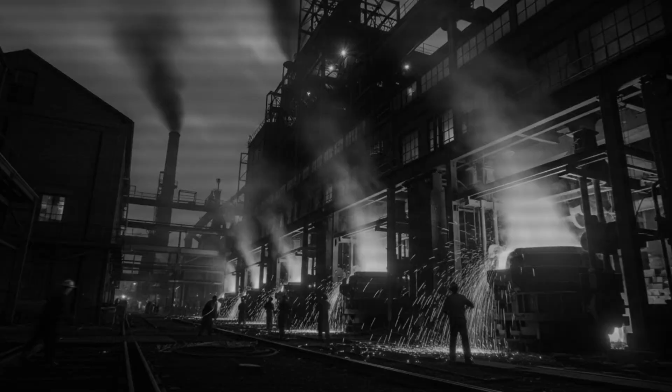As the bomb bay doors opened and thousands of pounds of explosives fell toward the factories below, German fighters swarmed in. Messerschmitts and Focke-Wulfs tore through the bomber streams. Tracer fire stitched the sky. Aircraft burned. Crews bailed out. Others vanished in spirals of smoke. By the end of the day, 60 B-17s were gone. Over 600 airmen were missing. More than 100 were dead.

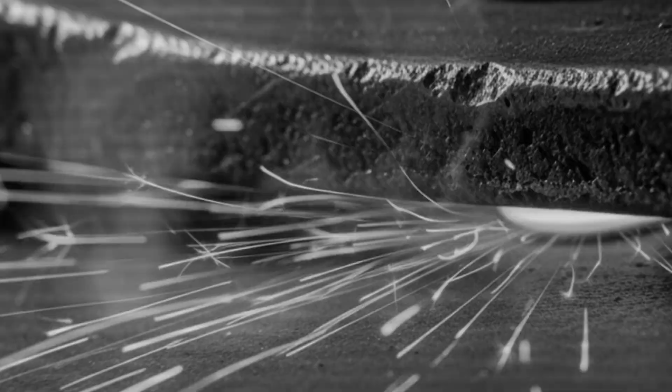While American crews were dying over Bavaria in an attempt to cripple German bearing production, something deeply ironic was happening thousands of miles away, in quiet industrial towns across the United States. American factories were already producing a bearing Germany could not easily replace, could not quickly copy, and could not stop by bombing Schweinfurt. A bearing that worked better for most military applications, and did not depend on German technology at all.

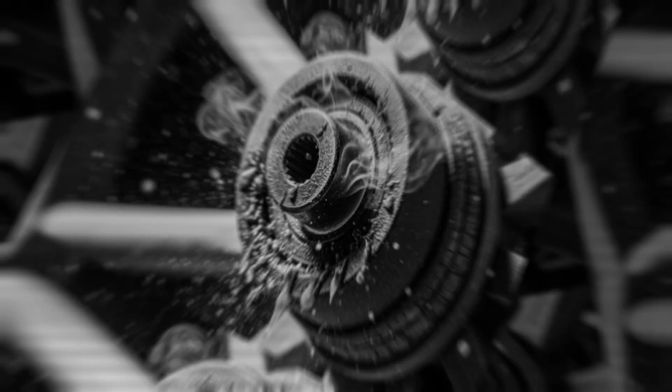Its story began not in World War II, not in Ohio, and not even in America, but in the mind of a German immigrant carriage maker, working in the late 19th century, obsessed with a deceptively simple problem: friction. Friction is the enemy of motion. Whenever two surfaces move against each other, energy is lost. Motion becomes heat. Metal wears. Efficiency collapses. From the first wagon axle to the most advanced turbine, controlling friction has always been one of engineering's central challenges. Henry Timken believed that anyone who could meaningfully reduce friction would create something of lasting value.

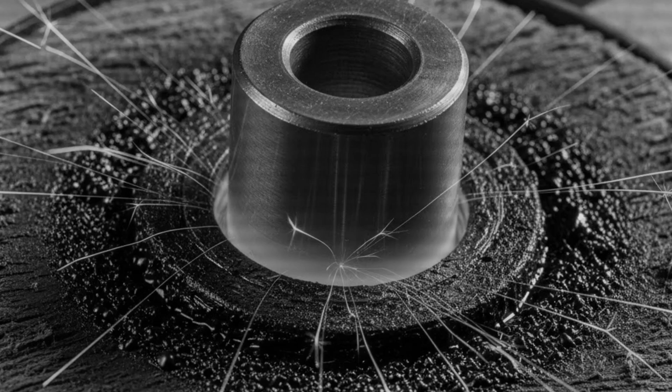He was born on August 16, 1831, in the Kingdom of Hanover, in what is now Germany. When he was 7 years old, his family emigrated to the United States, settling in Missouri. America was young, expanding, and hungry for infrastructure. Wagons, railways, machines—everything was being built, and everything depended on parts that could move reliably under load. As a teenager, Timken apprenticed with a respected wagon and carriage maker. He learned woodworking, metalworking, and, more importantly, the realities of mechanical failure. Axles seized. Wheels wore out. Bearings failed. Every breakdown was a lesson.

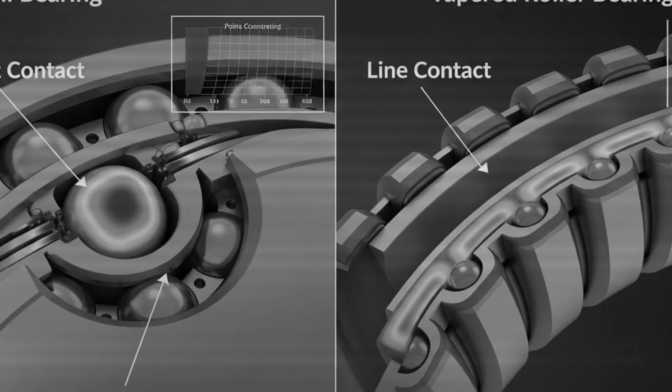By his mid-20s, Timken had opened his own carriage factory in St. Louis. He was not just a craftsman, he was an experimenter. In 1877, he patented an improved buggy spring that distributed load more effectively and survived rough roads better than existing designs. The spring was widely adopted across America and produced under license by multiple manufacturers, generating steady royalty income. The success of the spring brought Timken financial security and time.

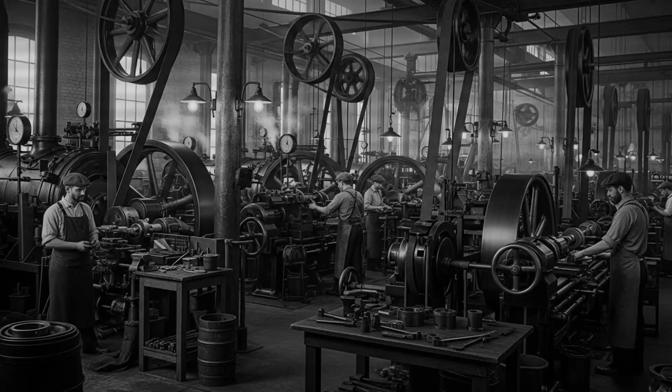Time to think. By the 1890s, he became increasingly focused on friction in wheel assemblies. Traditional bearings of the era were crude by modern standards. Most wagon wheels relied on plain bearings, simple metal surfaces sliding against each other, lubricated with grease. These worked, but they wasted enormous amounts of energy and wore out quickly under load. Ball bearings, which used hardened steel spheres rolling between two races, were a major improvement. They dramatically reduced friction and were ideal for light loads and high rotational speeds.

But Timken noticed a recurring problem. Wagon wheels did not experience simple, straight-down loads. They carried weight vertically, yes, but when a wagon turned, or hit uneven ground, or carried heavy cargo, the wheels experienced side loads and thrust loads at the same time. Ball bearings struggled under these combined forces. Their point contact concentrated stress, causing rapid wear and failure. Timken believed there had to be a better way.

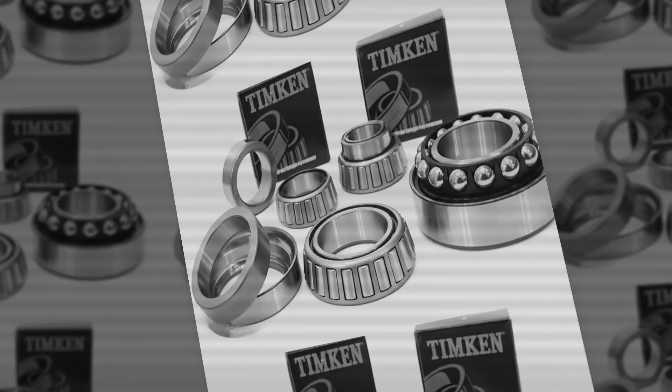With the help of his two sons and a nephew, he began experimenting. The solution they developed was elegant and radical. Instead of balls, they used rollers, but not cylindrical ones. The rollers were tapered, shaped like truncated cones, and arranged at precise angles between matching conical races. This geometry meant that loads were distributed along a line of contact instead of a single point. The bearing could handle radial loads and thrust loads simultaneously, exactly what vehicle wheels demanded. On May 1, 1898, Henry Timken was granted patents for the tapered roller bearing.

The impact of the invention was profound. Compared to ball bearings of similar size, Timken's design could carry several times the load, run cooler, last longer, and be adjusted as it wore.

It transformed the way heavy machinery could be built. In 1899, Timken incorporated the Timken Roller Bearing Axle Company, initially operating from a corner of his existing carriage factory in St. Louis. Demand exploded almost immediately.

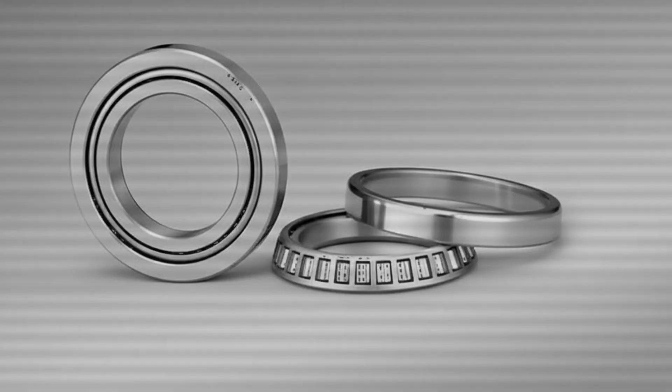By 1901, it was clear the company needed to be closer to America's emerging industrial heartland. Timken relocated operations to Canton, Ohio, strategically positioned near steel suppliers, rail networks, and the growing automotive industry centered in Detroit and Cleveland. While Timken was refining roller bearings in America, Europe, and Germany in particular, dominated ball bearing production.

German engineers had pioneered precision steel manufacturing decades earlier. In 1883, Friedrich Fischer developed a machine capable of mass-producing hardened steel balls with unprecedented accuracy. His factory in Schweinfurt became the foundation of what would grow into one of the world's largest bearing conglomerates.

Other companies followed. By the early 20th century, German and Swedish manufacturers, most notably SKF, had built global bearing empires. They controlled advanced metallurgy, grinding techniques, and international distribution networks. Before World War I, the majority of ball bearings used in American industry were imported from Germany.

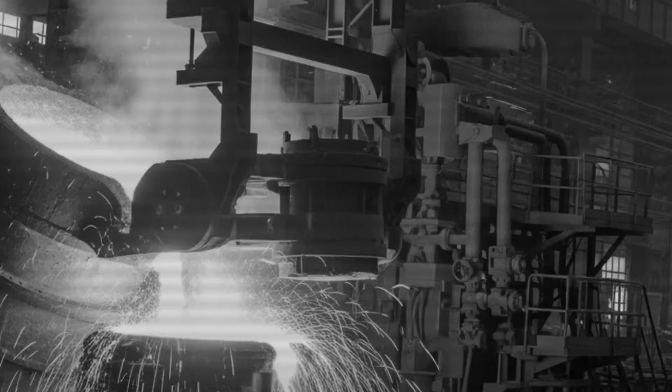Timken himself traveled to Europe in the 1890s, visiting German workshops and observing early internal combustion engines from Daimler and Benz. He understood how far ahead Europe was in precision manufacturing. But he also saw something they did not. European firms were perfecting ball bearings because that was the technology they knew. Timken's tapered roller design addressed a different class of problems: heavy loads, combined forces, durability over speed.

By 1920, the Timken company produced roughly 90% of all tapered roller bearings made in the United States. Railroads were early adopters. Tests on streetcars and freight wagons demonstrated dramatic reductions in maintenance and fuel consumption. High-speed passenger trains soon followed. Locomotives equipped with Timken bearings ran faster, farther, and cooler. The technology spread quietly, steadily, without headlines.

When World War I erupted in 1914, Germany's dominance in ball bearing production suddenly became a strategic vulnerability for everyone else. The British naval blockade cut off German exports. American manufacturers dependent on imported bearings faced shortages and soaring prices. Replacing ball bearings was not easy. Precision ball production required specialized machinery and skills concentrated almost entirely in Germany.

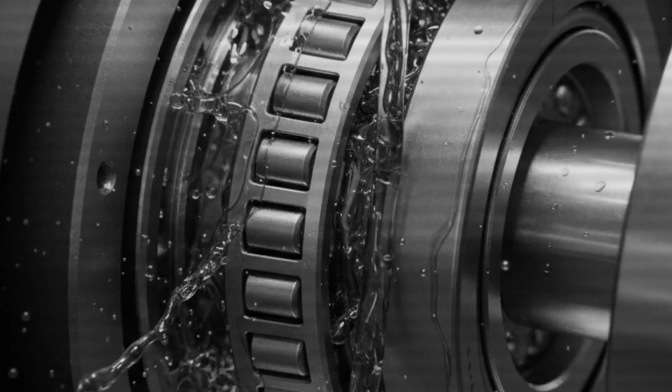Timken, however, was in a different position. Its factories already produced a bearing that could replace ball bearings in most heavy applications, and often outperform them. Trucks, artillery, rail equipment, and industrial machinery all transitioned to tapered rollers with minimal redesign.

The war revealed something critical. Dependence on a single foreign technology could cripple an entire industrial economy. Timken learned another lesson as well. Control of materials mattered as much as design. In 1917, facing steel shortages and inconsistent quality, the company began producing its own bearing steel in Canton. Vertical integration allowed complete control over chemistry, heat treatment, and cleanliness, factors absolutely essential for bearing reliability. This decision would echo through history.

Henry Timken did not live to see the full impact of his invention. He died in 1909. But his sons carried the company forward, expanding production, entering global markets, and quietly embedding tapered roller bearings into the backbone of modern industry. By the 1930s, Timken was one of America's most stable industrial firms, diversified across rail, automotive, agriculture, machine tools, and heavy equipment. When the world slid toward war again, the company was ready.

By 1943, Allied strategists believed that Germany's ball bearing industry was the Achilles heel of the Reich. Intelligence reports identified Schweinfurt as the critical node. What they did not fully appreciate was that Germany's enemies were not equally vulnerable.

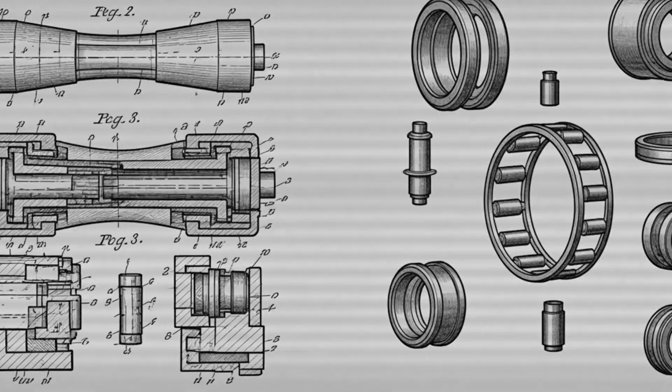Timken plants ran day and night. New facilities opened across Ohio. The company produced bearings for nearly every piece of Allied equipment. Every Jeep used 24 Timken bearings. Hundreds of thousands of Jeeps rolled off assembly lines.

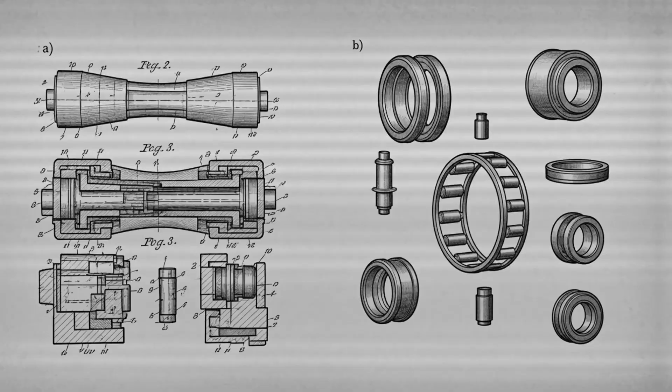Trucks, tanks, artillery, aircraft landing gear, ship propeller shafts, all depended on bearings that could survive shock, dirt, overload, and neglect. Tapered roller bearings did exactly that. They carried more load. They lasted longer. They could be adjusted instead of replaced. And they were made entirely within the United States, from steel to finished product. While Germany scrambled to protect centralized ball bearing plants, America quietly solved the problem by not needing them.

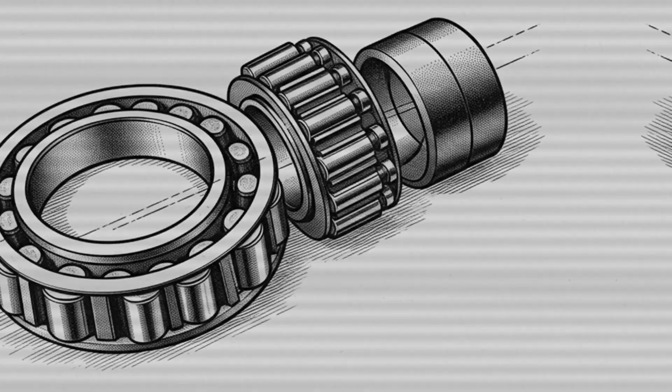The physics behind that advantage were simple, but devastatingly effective. A ball bearing touches its race at a point. Under load, that point deforms slightly into a tiny oval, but the contact area remains extremely small. Stress concentrates intensely at that spot. Under heavy combined loads, only a few balls carry most of the force, accelerating fatigue and failure.

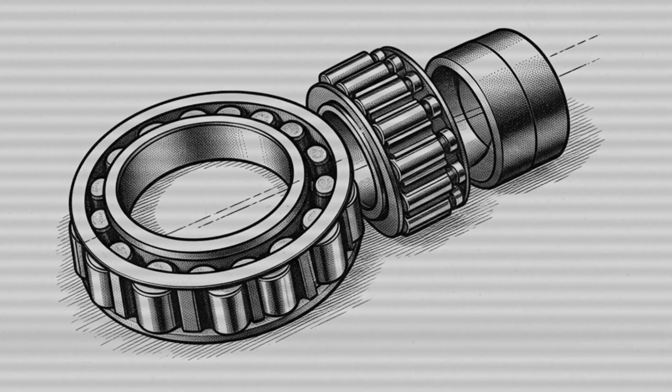A tapered roller bearing works differently. Each roller contacts its race along a line. Under load, that line spreads into a narrow rectangle, dramatically increasing contact area. Stress is distributed instead of concentrated.

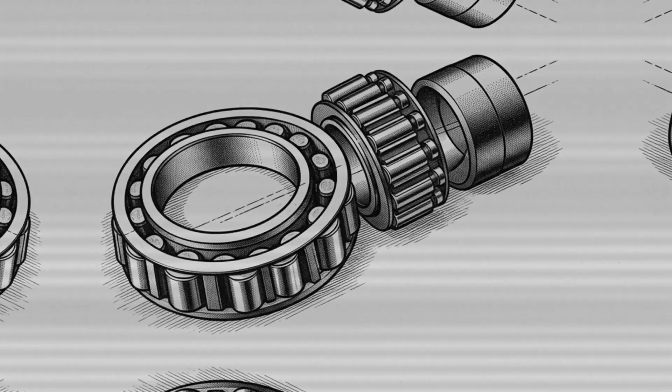All rollers share the load more evenly because of the bearing's geometry. Heat dissipates faster, wear slows, and service life extends. For high-speed, light-load applications—electric motors, instruments, machine tools—ball bearings remained ideal. But for military vehicles grinding through mud, shock, and neglect, tapered rollers were superior.

German engineers understood this in theory, but theory does not win wars. By the time World War II began, Germany's bearing industry was deeply invested in ball bearing production. Retooling factories, retraining workers, redesigning equipment—all of it would have required time Germany did not have. War freezes technology in place; you fight with what you already make.

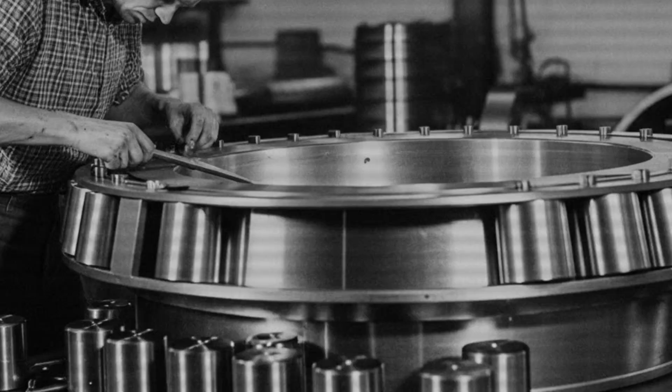America, by contrast, entered the war with dispersed, vertically integrated bearing production built around tapered rollers. The difference would never appear on a battlefield map, but it would shape every battlefield outcome.

After the disastrous Schweinfurt raids of 1943, Allied bombing strategy shifted. Long-range fighter escorts were still unavailable, and loss rates were unsustainable. The ball-bearing campaign faded into history as one of the most costly air offensives with the least decisive results. German armaments minister Albert Speer later admitted that concentrated attacks might have crippled production, but only if sustained.

They were not. Germany adapted. Underground facilities replaced centralized factories. Imports filled gaps. Stockpiles grew. By 1945, Germany actually held more bearing inventory than before the raids began. The airmen paid the price anyway. But the outcome of the war did not hinge on Schweinfurt—it hinged on logistics. And logistics hinge on components that almost no one notices, until they fail.

During the war years, Timken's output more than doubled its previous peak. The company manufactured hundreds of millions of bearings. Its factories produced gun tubes, rock bits, steel tubing, and precision components that fed every branch of the Allied war machine. The Timken Ordnance Company alone produced tens of thousands of artillery barrels. New plants opened in Zanesville, Columbus, and Newton Falls. Employment surged. Production never stopped.

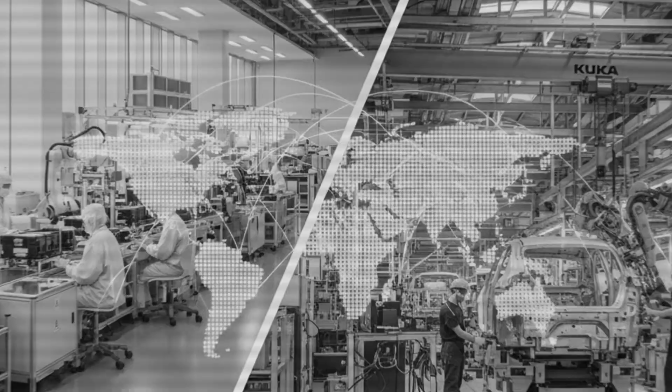Every bearing that did not fail meant one less vehicle sidelined, one less repair crew diverted, one more convoy that reached the front. The advantage compounded invisibly. German industry fought the war with chronic bearing anxiety. American industry barely thought about it.

That contrast mattered. After the war, American machinery flooded Europe under the Marshall Plan—tractors, locomotives, factory equipment, much of it fitted with Timken bearings. European industries rebuilt using American components, not because of ideology, but because they worked. Ironically, this success created legal trouble.

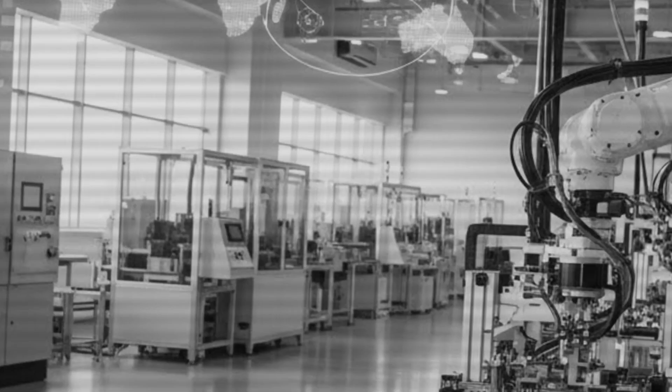In the post-war years, the US government pursued antitrust cases against American firms with international agreements. Timken was accused of restraining trade through territorial arrangements with its British and French affiliates—agreements originally designed to manage capacity during wartime shortages. The Supreme Court ruled against Timken in 1951. The company restructured its international operations and moved on.

The growth did not slow. By the 1960s and 1970s, Timken operated on every continent. It entered Japan, one of the world's most demanding bearing markets, and expanded across Europe, Asia, South America, and Africa. In 2003, Timken acquired Torrington, doubling its size and securing its position as a global leader. In 2014, bearing and steel operations separated, allowing each business to focus independently.

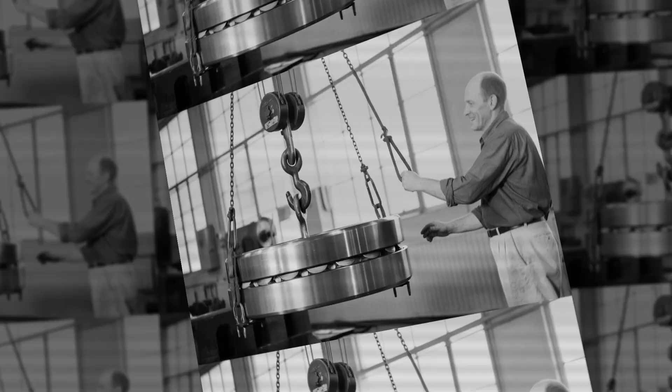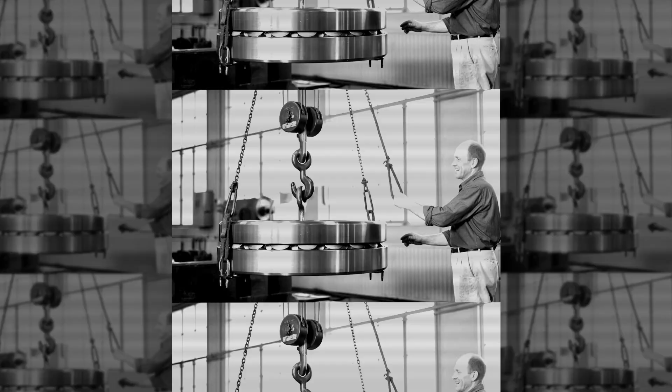By the 21st century, Timken employed tens of thousands of people and generated billions in annual revenue. It manufactured not only tapered rollers but ball bearings, spherical bearings, cylindrical bearings, thrust bearings, and precision systems for aerospace and industry. Yet tapered roller bearings remained its foundation. From bearings small enough to fit inside computer drives to custom units weighing several tons for steel mills and wind turbines, the same geometry patented in 1898 remained central. The physics had not changed.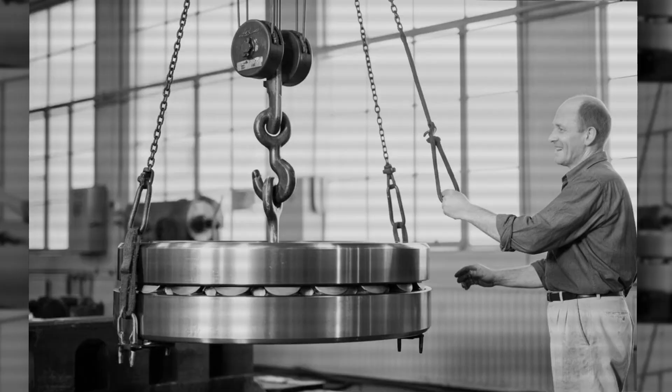The final irony of the story is this: Henry Timken was German by birth. He learned precision from German craftsmanship and studied European engineering firsthand. But it was in America that his idea flourished—not because it was flashy, or dramatic, or politically favored, but because American industry could adopt it at scale.

Germany entered World War II dependent on centralized ball bearing production, vulnerable to bombing and blockade. America entered the war with diversified bearing technology, domestic steel production, and a design better suited to the realities of military machinery. No general ever gave a speech about bearings, and no medal was awarded for reducing friction. But armies do not move on speeches. They move on axles, and axles move on bearings.

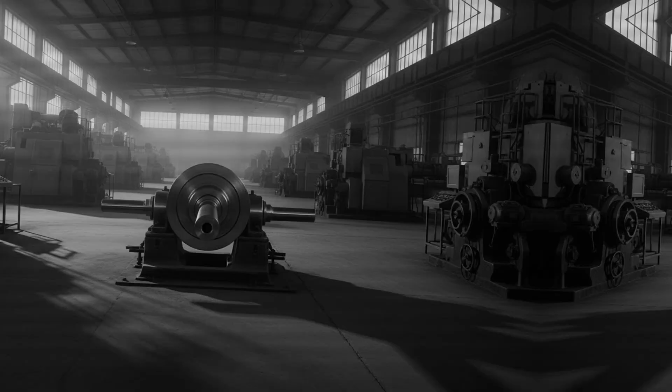While bombers burned over Bavaria trying to destroy German factories, American plants in Ohio quietly produced something better—not through daring raids or grand strategy, but through patient engineering and relentless manufacturing. The bearing war was not won in the sky. It was won on factory floors, where an immigrant carriage maker's idea rolled off production lines by the millions.

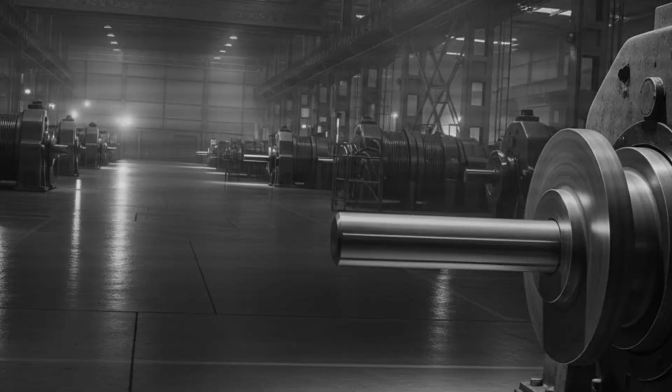Henry Timken never set out to influence global conflict. He wanted to build a better wagon. In doing so, he solved a problem that generals could not, and helped ensure that when the greatest war in history came, American machines kept moving. Friction was reduced. Motion continued. And victory followed.